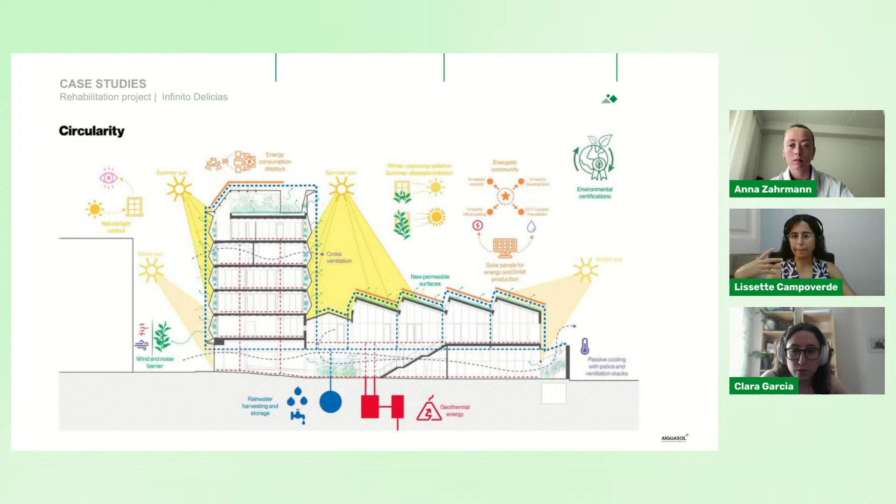So the architectural conception of it was to introduce... okay. Yeah, I think because the slide had animation, so it was a little bit trickier.

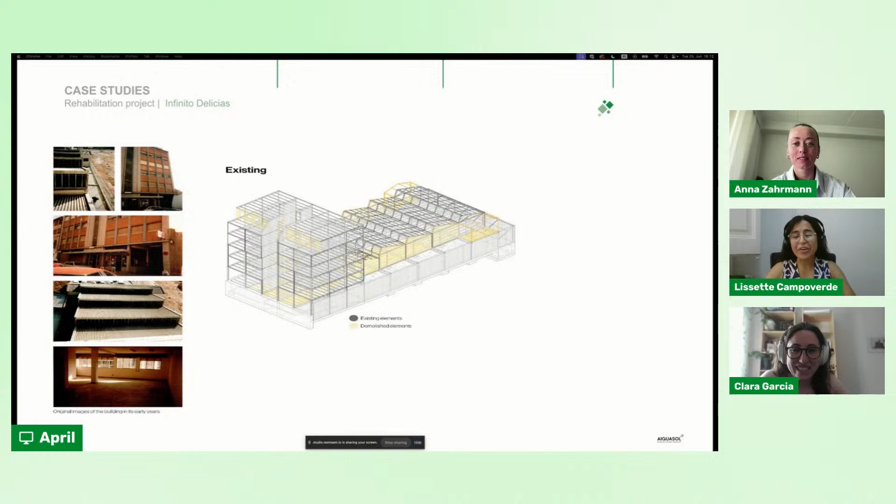Now everybody can see the existing structure. This is why it was a nice image to show, because we can see the existing building, and what is meant to be preserved is most of the existing structure.

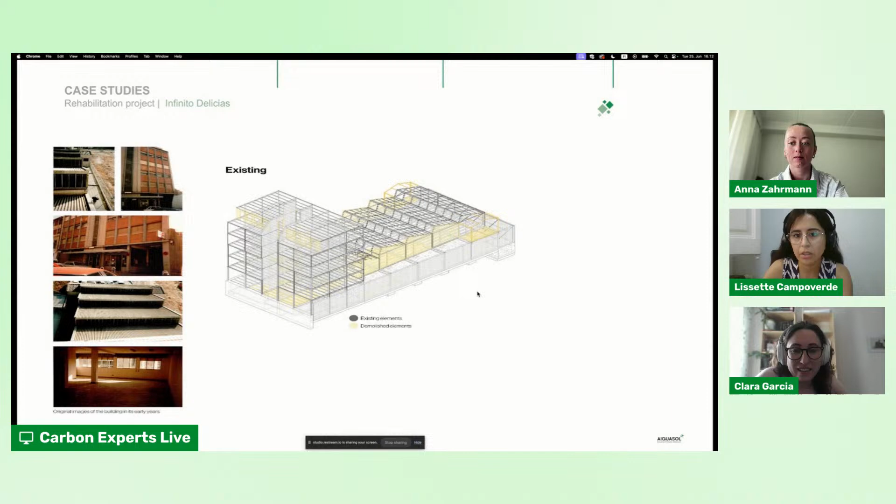If you can go ahead to the next animation. The intervention of the architectural team is to give strength to the facade and engage all of these bioclimatic efforts that they want to put into their goals. Regarding the new materials added, they focused more on regenerative materials like biodegradable insulation or cork insulation from local sources, and if they come from wood, they are sustainably harvested and so on.

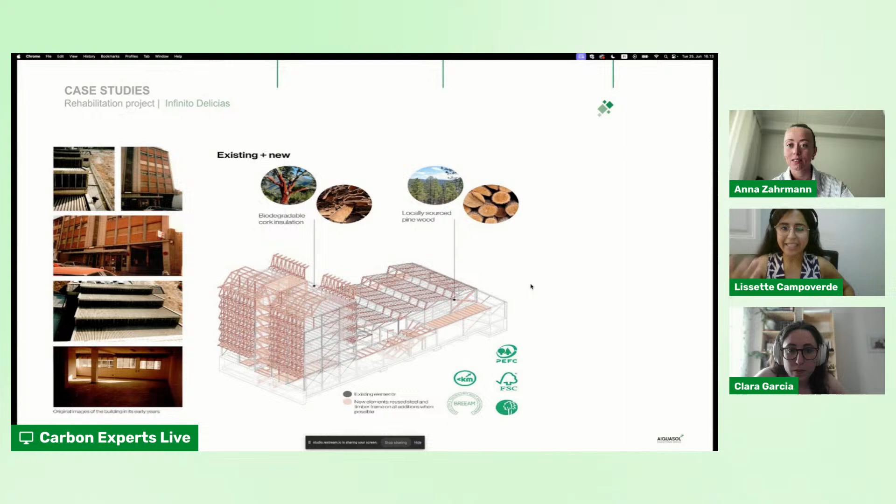Can you give it to the next one, please? Now we can see the one we were seeing before. These are all of the strategies used in this project. Aside from keeping the structure and using regenerative materials, we also have the bioclimatic goals they want to achieve, just to improve the energy and operational consumption.

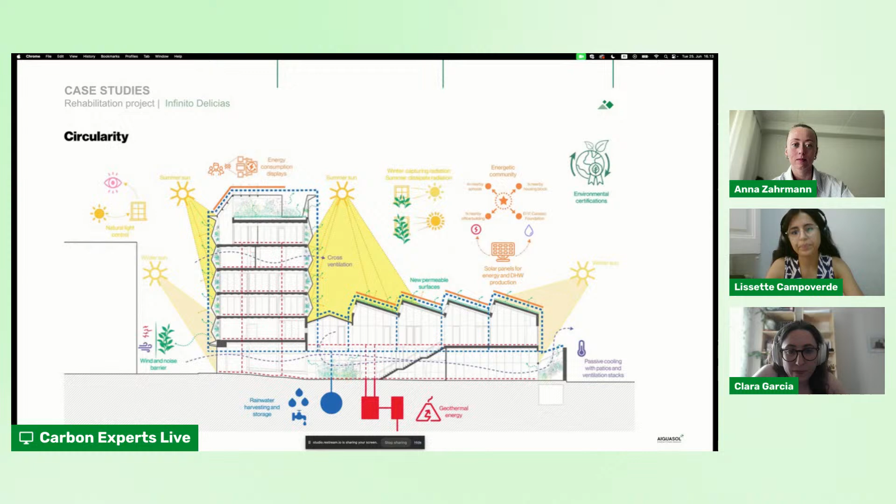Okay, next. So what do we need to do in order to have this result? Like every carbon project, we need to start with a benchmark or baseline reference, which we defined to compare the traditional versus a rehabilitation project, because this is what they wanted to see: what are we gaining in emissions if we are doing a rehabilitation project? Then there's the system boundaries, how our project was allocated, what parts of the building we were going to include and what parts were out of it.

We are analyzing embodied carbon, and we are doing all of the building parts. I think you can go next. Thanks.

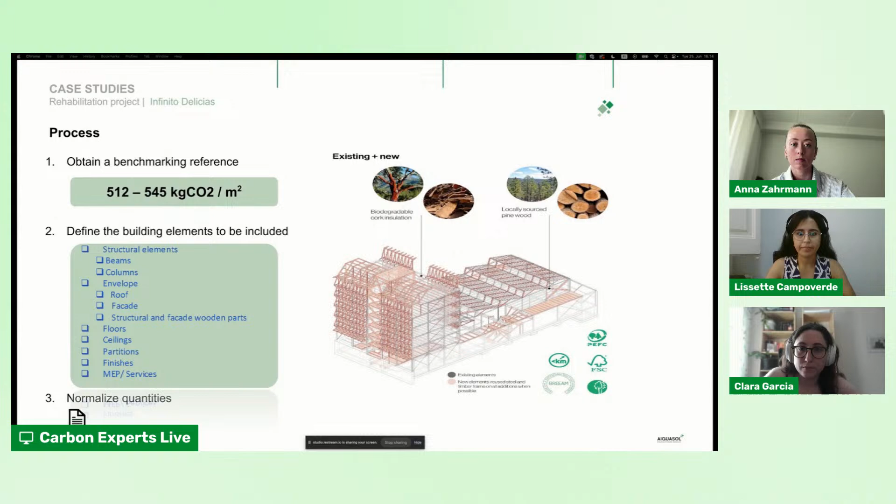And here we have the project results. The main question the architectural and design team had was: what was the gain between a traditional and rehabilitation project? As you can see, it's around 50% emission reduction in embodied carbon by reusing the structure and using regenerative materials. It also gives us a lot of insights into what the use of regenerative materials has on embodied carbon, as you can see with biogenic carbon, which is something we are now talking about with more effort.

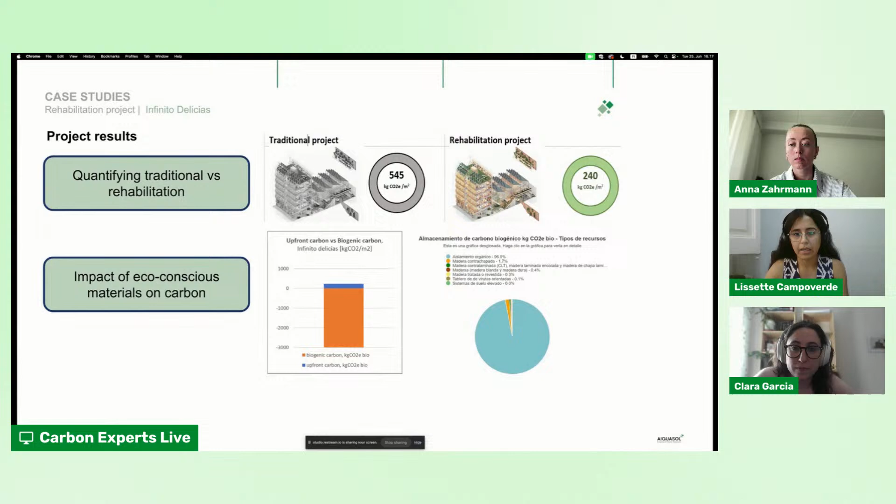I wanted to mention that in this project specifically, most of the biogenic carbon was attributed to the cork insulation that was used, because of the volume of the material, how it reduces energy consumption, and how it comes from a natural source. I think it's a lot of carbon reduction.

And finally, the cherry on the cake: this project was awarded the Holcim Gold Europe Award last year, because of the reuse of the structure and the selection of regenerative materials.

So it was appraised by the jury that the information of this project, the metrics, the outcomes, were communicated in a robust and understandable way to show the project impact and showcase the reduction of carbon emissions. For me, this was really nice to hear from the organization of the award, because it showcased how the LCA is a tool to engage and optimize the design.

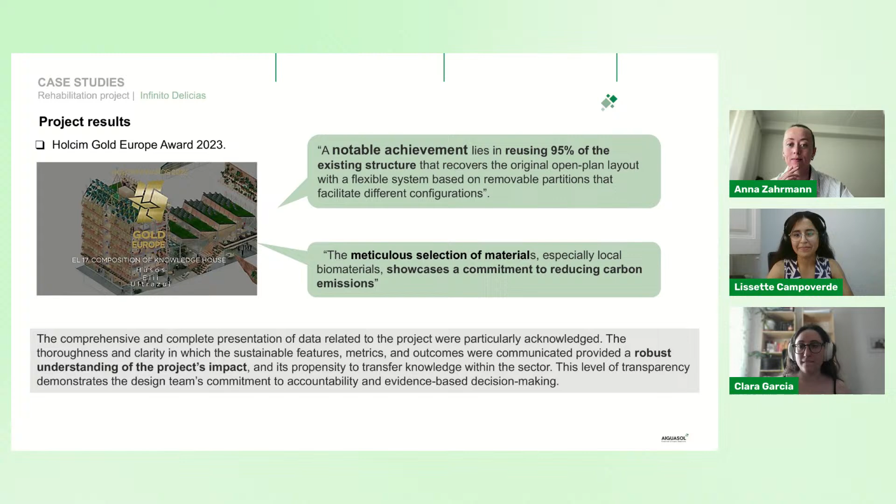So we can go to the next slide. And here we have the second case, which is the new Velindre Cancer Center, the hospital in Cardiff.

This project, I think, showcased the same amount of stakeholders, but the communication channel had to be constructed through a digital cloud, because the amount of stakeholders involved in construction and a hospital project from scratch is huge. So in this project, it was more interesting to understand which information comes from where and where decisions are being taken.

The reference period is the same, 60 years, same as the system boundary. This, as I mentioned, aimed to be the highest performing low energy hospital and the greenest hospital in the UK. As a private certification, they want outstanding or excellent building certification, and alignment with mandatory normatives. Can you go to the next slide, please?

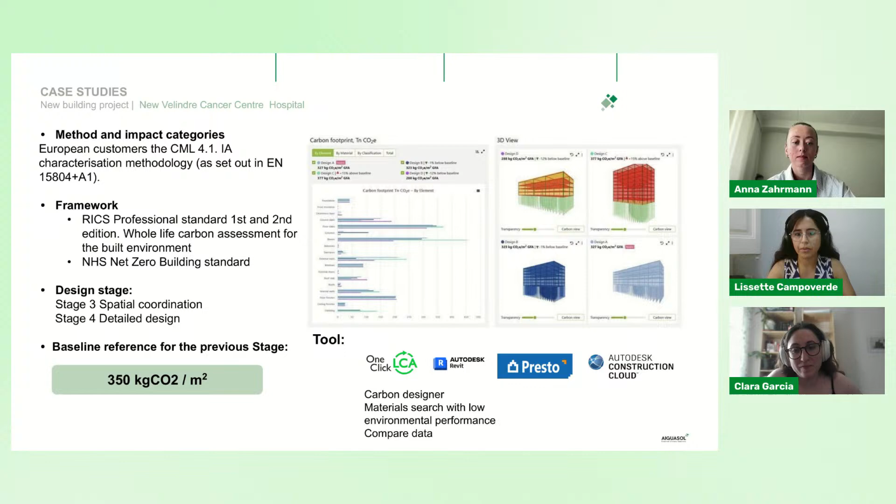What I did not mention is the building unit composition: a basement, a semi-buried floor, and 2 floors up, with a common area of 55,000 square meters. The design team, which is the architectural team and also the structural engineering team, is what we consider the design team.

So the hierarchy they have to perform to reduce carbon is the same one advised for each of these projects: build nothing, build less, build clever, and build efficiently.

The flag of this project was to really optimize the use of volumes and reduce the materials that are impactful. Like if we have to use concrete, let's use the one with the most recycled amount, or reshape our concrete solution so we need less. So we used reinforced concrete with 50% GGBS, and maximized the use of timber for beams and slabs, and so on.

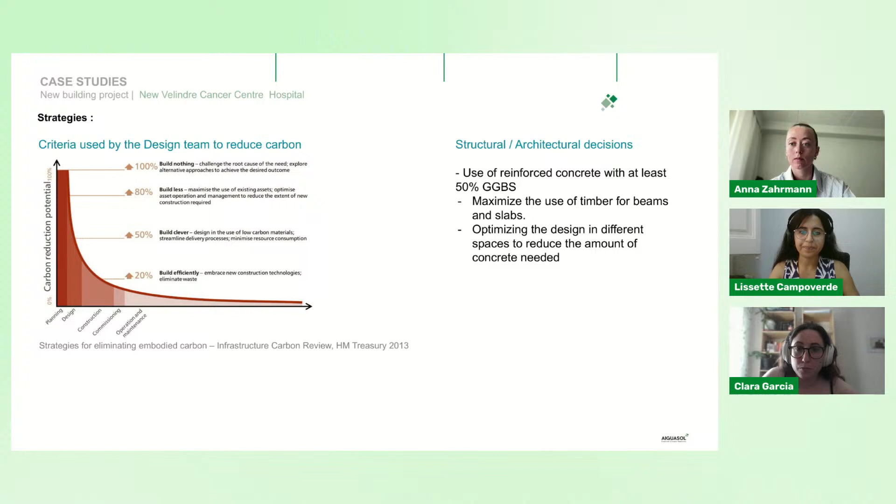Can we go to next? And the elements considered, well, as I was mentioning before, the basement, the semi-buried floor, the 2 stories, and the top floor for facilities.

We worked in stage 3 on substructure and superstructure, and during stage 4 we went deep on the superstructure, the facade, and the building services, which is a big area.

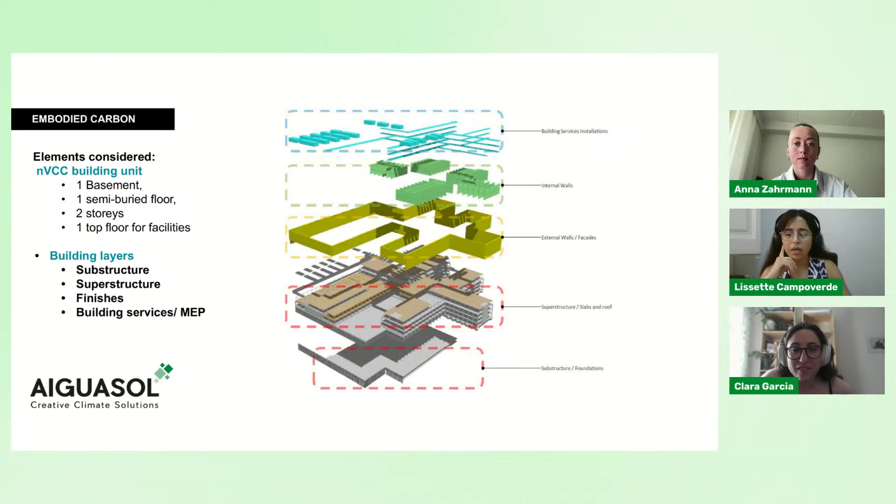Next slide, please. And now the fun part. This is one of the things I'm mostly proud of, because the design team had to use the least amount of material, or the one with the lowest environmental impact. So the bunker area and the foundations were constantly analyzed, and we ran scenarios of different configurations to find which one produces the lowest environmental footprint per square meter.

Sometimes it's difficult, especially with foundations and the main structure, because the focus is on technical performance. It's different with the facade and the structure, where technical performance is also important. Of course everything is important, but especially in these two areas it's tricky to choose an environmental solution that isn't proven, or a material that isn't available in the amounts required.

So we found that this kind of scenario drawing was very useful, and in most cases we reduced the environmental footprint by half in each scenario drawn.

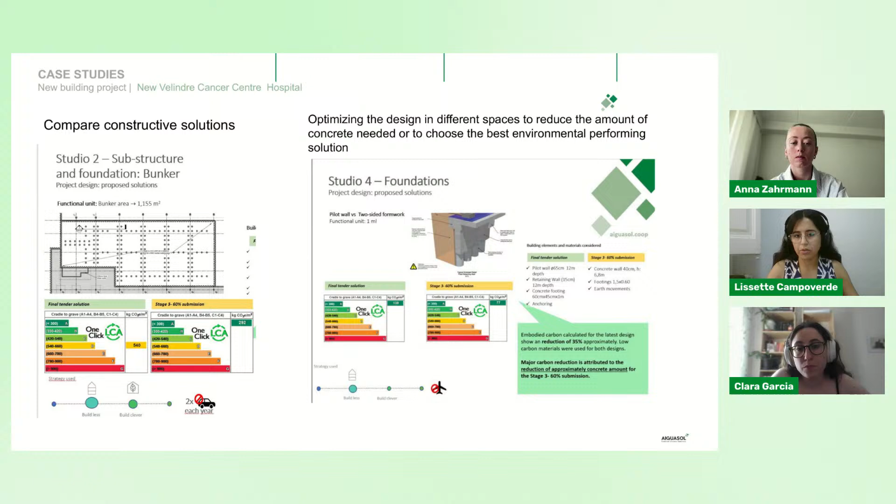The other thing we used One Click for as a main tool was to compare and search. As we evaluated the constructive solution, we compared materials for each type of beam we were going to use in the hospital—beams represent a lot of volume, and either way they represent a lot of embodied carbon. We also looked at their performance on the market, which brand is best, and what level of performance is usual.

And then sometimes, especially with the architectural team, by stage 4 they had already defined the materials and providers. So in cases where we were showing high embodied carbon consumption, we were asked to provide assistance on new types of materials or providers in order to lower the embodied carbon.

I want to ask you, Liz, how complicated it was, because to me it looks complicated, like to make a whole team and even several teams join with the same mindset of trying to reduce the impact, with all the teams going in the same direction. How complicated is that? How did you do it?

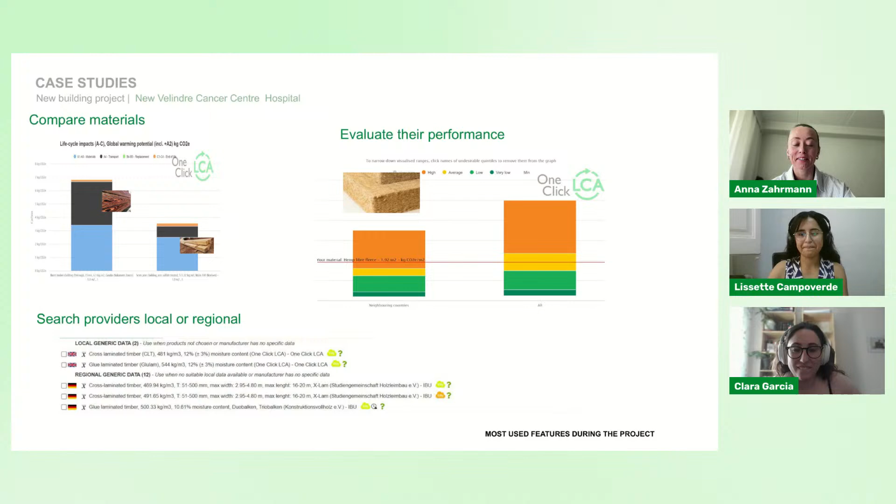Okay, thank you so much. Thank you so much for presenting these two study cases. I think they're very exciting, especially the first one—I got so excited that you managed to reduce the carbon by half, like 50%. That's amazing.

We have a few additional questions, but I think those are more like takeaways. What do you think are the future challenges, looking a bit into the future—what is coming? Where do you see the industry going, and services going?